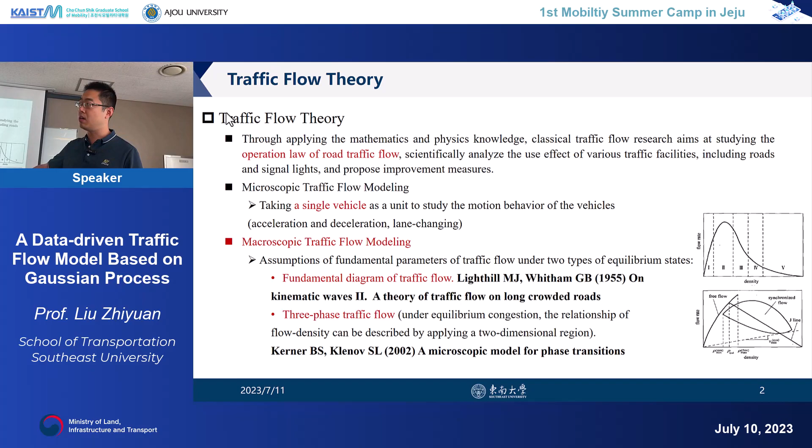like microscopic traffic flow modeling, where we use the motion behavior of the vehicles, and macroscopic traffic modeling. A very famous macroscopic traffic model is the fundamental diagram. This model was proposed about 80 years ago, in the 1930s, by the very famous professor Greenshields. I think you all know the Greenshields model for the fundamental diagram, right? In the following decades, nearly 100 years, we have different types of traffic flow models, for example the LWR model and the MFD, those new developments. But all this research dates back to the initial point proposed by Professor Greenshields.

Back in the 1930s, when the private camera was just popular, Greenshields used this camera to take pictures of the moving vehicles. So we see that he must be a very boring person. Why? Because if you buy a new camera, you take photos of your girlfriend. He takes the camera to take photos of the vehicles. But because of this behavior, he found a very interesting phenomenon.

It's this line here, okay? The x-axis is density. The y-axis is speed. He found out that there is a trend between density and speed. That means if the density is high, the speed gets much lower. So there's a negative proportion between the density and the speed. This we call the number one scientific finding of traffic engineering. We borrow different theories from mathematics and economics into the transport area, but it's a consensus that this finding is the most important research finding in the transport area. And that gives us this traffic flow theory model.

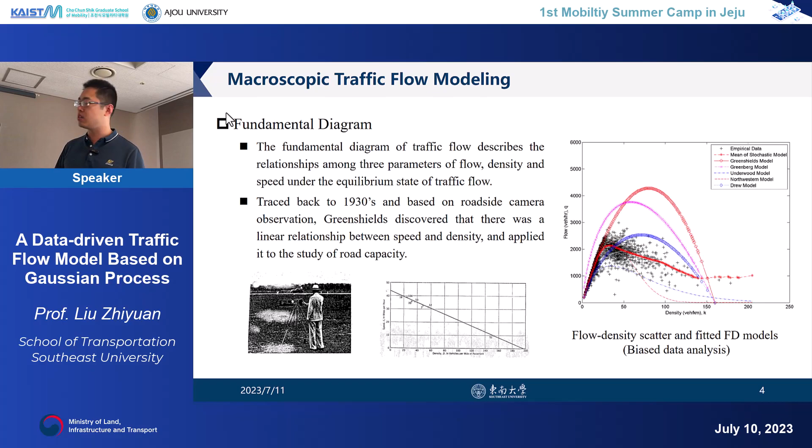So Xiaobo just considered unbiasedness, and then he developed a new model. Okay, it's the Qu model, right? Yeah. So this research is still the frontier, and it's a very hot topic until now. But today, because we are focused on the new trend, it's like a new generation of model.

So we don't talk about the good side of this fundamental diagram. We talk about the negative side. Only when you find the problem, you can make a new contribution, right? So when you find a problem, you are more than half successful because you can always find a method to solve your problem. So finding the problem is the most important for the researcher.

So we talk about this model, and we find 3 very key problems. I will deliver to you the 3 problems. So if you agree that this problem is not acceptable, then you will see the value of big data. You will see the value of data-driven model.

Okay. So number 1 problem is that if you read papers, you can see there are piles of papers on the traffic flow model. Greenshields, Underwood model, all these models in the past 80 years, they assume one thing: equilibrium state. For example, Eddy's paper. Eddy is a very famous professor on traffic flow theory. All his papers published at good journals, TR Part B, Transportation Science, have one assumption: equilibrium state. So if you just take this assumption, you will be confronted by a lot of mathematical equations.

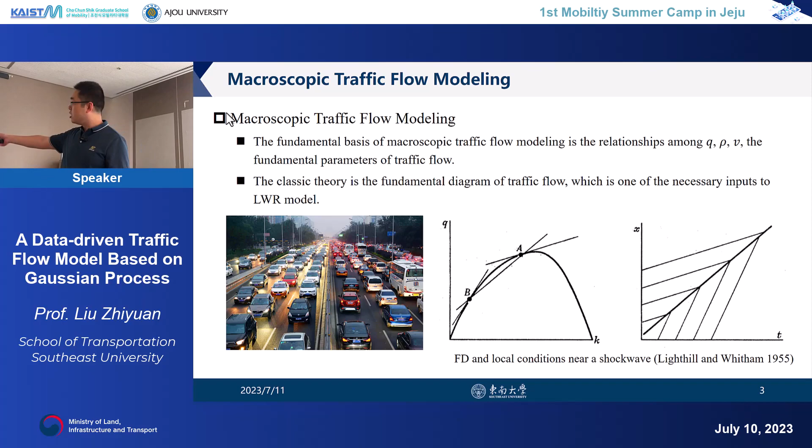But when I teach my students this, I doubt myself, why is it spatial average speed? The textbook told me so, but I don't really understand. I just memorized it, okay? So this fundamental diagram, we will doubt it. Q equals rho times V holds only if you assume the equilibrium state.

And another very important outcome is that when I read the textbook for traffic flow theory, they have this conclusion, that you can use the harmonic mean of speed at a cross-section to replace the space mean speed. Why do you need something to replace the space mean speed? Because this value is not easy to measure. It's difficult to measure, so that's why they use this.

When I read all the textbooks, just like at your age, I learned traffic flow theory at least 3 times. Undergraduate study, PhD study, and also. So I learned this traffic flow theory. I read all the textbooks. They tell me this conclusion. But how come it's true?

So after I do my own research, I do a lot of derivation. I have 2 pages of mathematical equations. I do all the derivation. I finally understand. Only if you assume equilibrium state, then this conclusion is true. So that means a lot of existing conclusions in traffic flow theory are problematic, because in urban areas and in a very chaotic system, the equilibrium state doesn't make sense. You understand me? Okay, that's the first problem.

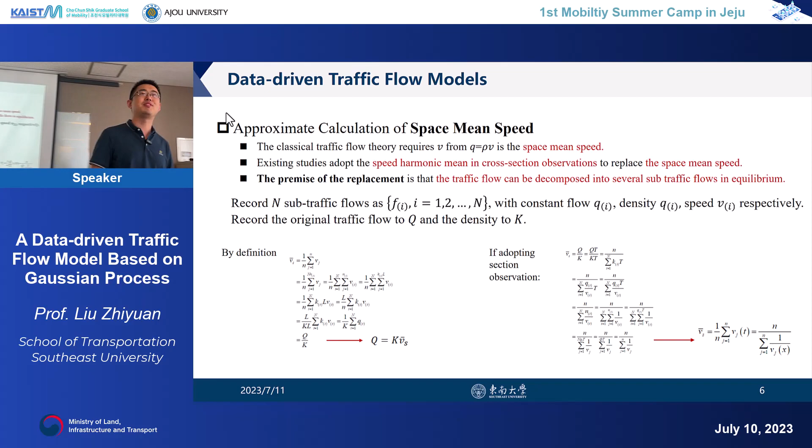Albert Einstein is great because he found the problems and then he could find a good solution. He was poor in mathematics, but he could get helpers. So the most important capability of Albert Einstein is he can find problems. So now we've just delivered the first problem to you, and let's see the second problem.

Okay, the second problem is that in traffic engineering studies, we have 2 different standpoints, 2 different patterns for data collection. One pattern is cross-section observation, okay? Dr. Kim will give you a lot of data by cross-section observation. So this is a very theoretical term. So what does that mean? That means you use sensors to get data, okay? Imagine there's a detection loop or some kind of gantry for traffic flow observation. So you have sensors at one point to collect data, okay?

So for this cross-section, basically it means you focus on one location. So you compromise the spatial value. You only focus on one spatial point, one location, okay? And you collect data for a certain time interval. You understand me? Yeah, so the space is compromised, only one point. But you collect data for 1 minute or 1 hour, and then you get all the data you need. You can measure the density and the speed, right? Yeah, so this is a cross-section.

And another is instantaneous observation. So instantaneous is on the other side, okay? So you just focus on one time spot. So it's instantaneous. And for the spatial interval, you have a certain spatial interval. You get me? So for instantaneous observation, at this particular time spot, you can measure the speed of all the moving vehicles and also the density of this traffic flow.

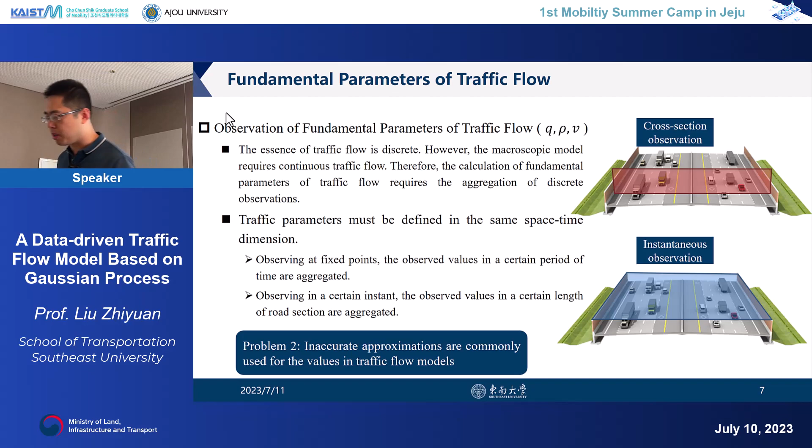The answer is no. Still, if it's an equilibrium state, they are the same thing. But in urban areas, the vehicles are changing their speed all the time. So statistically speaking, they are not the same term at all. So if you use this replacement, later I will show you, the error could be 50%. That means it's a very, very big mistake you are making here. Okay, that's problem 2. So you should not use any inaccurate approximation. And that's a problem of traditional models. Okay, so let's come to the third problem.

The third problem is very easy to understand because I'm working on the big data side. And these days in the urban area, the local Land Transport Authority provides us with different kinds of big data. We have more than 30 types of big data. But for your traffic flow theory model, how many types of data can you use? They can only make use of at most 3 types of data, because there are 3 terms, right?

Q, rho, V. Q, rho, V, and you even have mathematical functions to build a connection between them. So actually there's only one decision variable, which is speed. Okay, so when you get the speed, you can just calculate the density and you can just calculate the flow. So there's only one variable.

So we have 30 plus different types of data, but your model can only take 3 variables. That means you are wasting at least 27 types of data. You get my point? So our previous modeling framework is not powerful enough to handle the data. The whole framework is just not able to accommodate other different types of data.

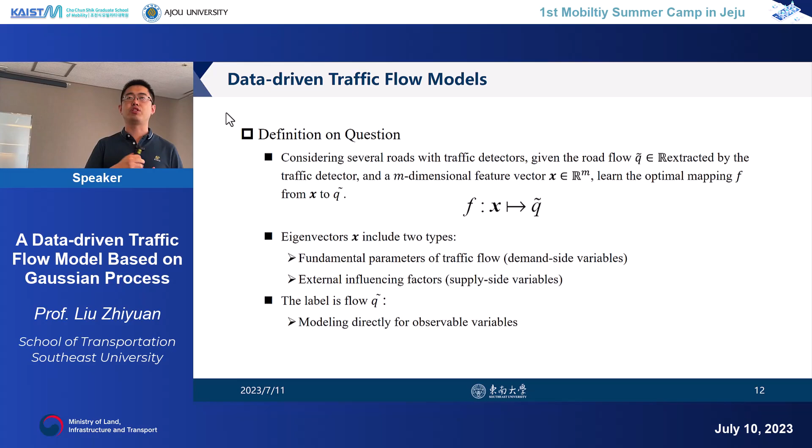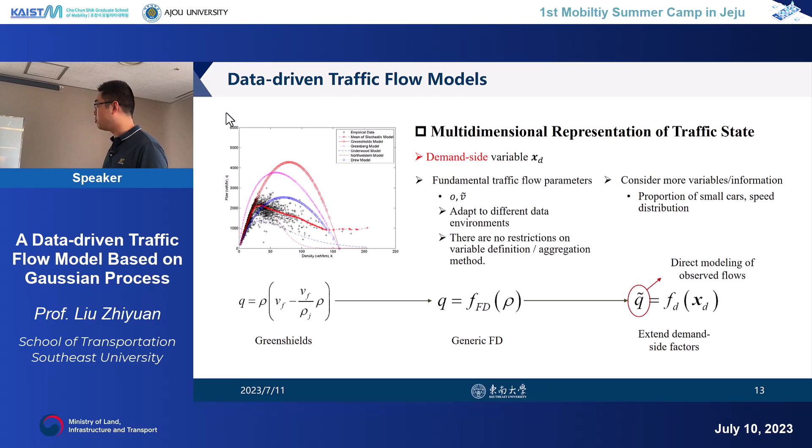So here for our theory, we first focus on demand side variables. So we find all these variables related to traffic flow itself. For example, the speed, the density, and all other features of the traffic flows. So we focus on the demand side variables, which is very straightforward, not a surprise. But we just ask ourselves, for traffic flow, have you ever thought about the supply side variables? Do the supply side variables affect traffic flow movement?

The answer is yes. So your traffic flow, especially in the chaotic urban area, is largely affected by the traffic signal, by the weather, by the road geometric design, whether there's a bus, whether there's a median. It's a big factor to influence the traffic flow. So why not consider all these supply side variables as decision variables in traffic flow theory? That's a breakthrough we have made there.

Okay, so for our traffic flow model, we just develop a model like this. So there's demand side variables and there's supply side variables, and there's Q. So what does that mean? That means previously, Dr. Yin He was working on traffic signal analysis. So you optimize your signal. You use Vissim. Dr. Yin He also worked in PTV, the best simulation software in our area. So you use Vissim, you use software to analyze different signal plans.

You have 10 potential patterns, and you use Vissim to analyze, to measure each of them. You find the best one. But there are maybe 1,000 other potential plans. You just don't have enough time to measure them. So what we do is that we take the signal plan as a decision variable in our traffic flow theory. In that case, we don't need simulation to measure a given plan. We can just use the traffic flow model to output the best signal plan. Okay, you get me? So that's actually a very initial trend of large models.

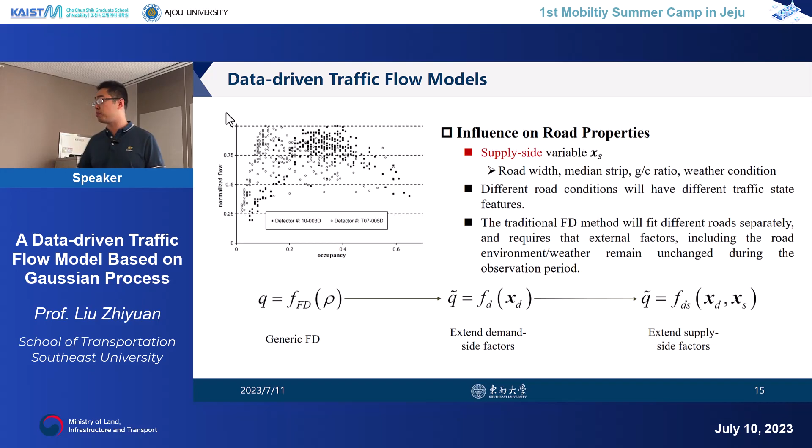We can take the traffic signal, the weather, all those things. As long as it has impact on traffic flow, we take everything as our decision variables, as our parameters. So that's the idea behind large model. Okay. So it comes to this part.

I take myself as a modeler. So I spend most of my time on the mathematical equations, on the algorithm. So actually, most of my time I focus on this part, from this slide onwards. But here, what I want to deliver to you is that even though you can build a very complex mathematical model, the model itself is nothing. The model is just some already mature tools that you borrow from the mathematical disciplines.

So what is the most important is your idea, is your critical thinking, is the problem you find in existing study. So as long as we find the problem, we have our idea, which is our modeling framework, then this part becomes very easy. This part you can definitely find someone good at mathematics to help you, just like Albert Einstein.

Okay, so here, what kind of model can we use for a data-driven problem like this? We have supply side, we have demand side decision variables, and we use the flow as our output, as our label. So what kind of model do we use? If you read a machine learning textbook, or a survey, you learn about machine learning models, like SVM, deep learning, right? TensorFlow. Or you only learn about ChatGPT, right? Because it helps you on the homework. Yeah. So all different types of model, yes, you can use them.

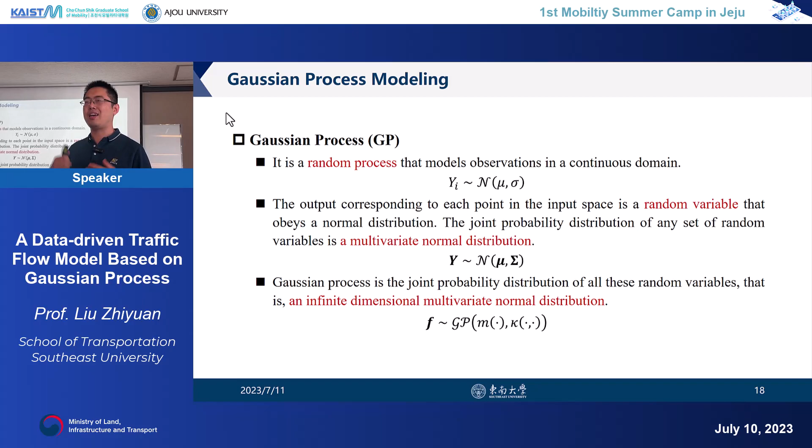Okay, so here we come to our Gaussian process. The idea behind it is very, very easy. But if you check a paper, you check a textbook, it will be a real torture to you. You will find it's a headache to read those papers because of a lot of mathematical equations. So same story to me. Back 5 years ago, the first time I studied the Gaussian process, at least 2 months of my time was wasted. Why? Because I checked everything from the internet. And on the internet, a lot of study materials for Gaussian process are wrong. A lot of errors. People do not really understand the Gaussian process, but they write those blogs, those online papers.

So the idea behind the Gaussian process, I can use 3 minutes to tell you the real idea behind it, and you will understand the most powerful and the most frontier machine learning tool we use nowadays. Okay, if you go to MIT, you go to Berkeley, those top universities, the OR professors, the computer science professors, many of them work on the Gaussian process. It's very frontier. So the idea behind it is like this. Okay, let's start our tour.

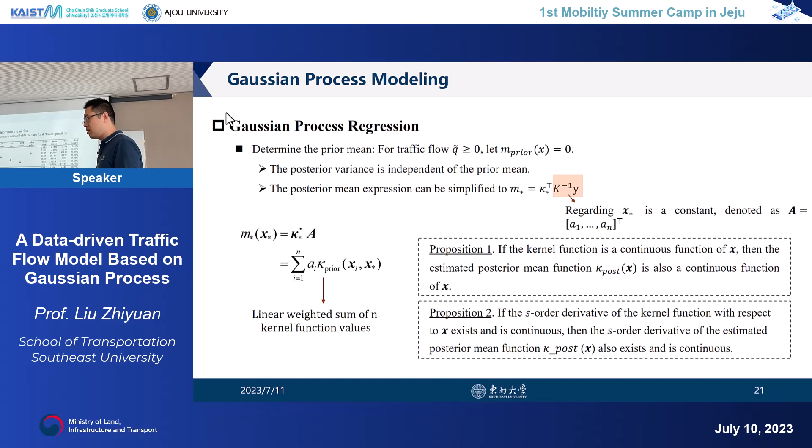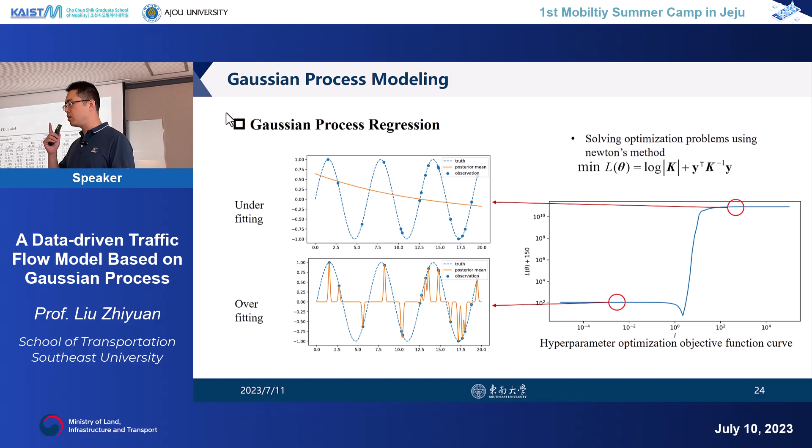If you are working on big data, you want to find a job in future as an AI-related, AI-aided engineer, so you should give a very straightforward answer to this question. What is the value of machine learning? The key value, the most important value, is accuracy.

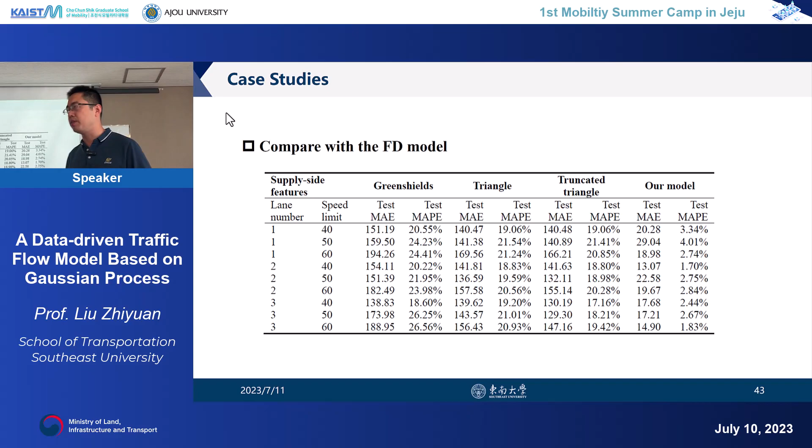Okay, so we did a test, which is falsifiable. Falsifiability is very, very important for transport studies because some of our previous theory, four-step model, the user equilibrium, although the theory itself is very complicated, it's not falsifiable. It cannot be tested in practice. That means it's not science. It's not real science. Okay, so it must be falsifiable. It must be okay to test. So how to test our model?

We use fitness as a very, very simple test. Okay, the fitness itself is objective, is reliable, is falsifiable. So if you collect real data and your data is reliable, you find that the Greenshields model, the fundamental diagram model, the fitness error, we're not talking about some other complicated task like prediction, like planning, we're talking about the fitness itself, the fitness error is higher than 20%, which is definitely not acceptable. So 50% means purely random.

20%: you spend so much energy, you spend 80 years on a theory to kind of refine the model, but the fitness error itself is higher than 20%, which means the model itself just lose 80% of useful information. Okay, so fitness error, if we check the Gaussian process, our model, we haven't really fine-tuned the parameter. So just the initial model itself, the fitness error is lower than 3%. It's 10 times better. So you get the point behind?

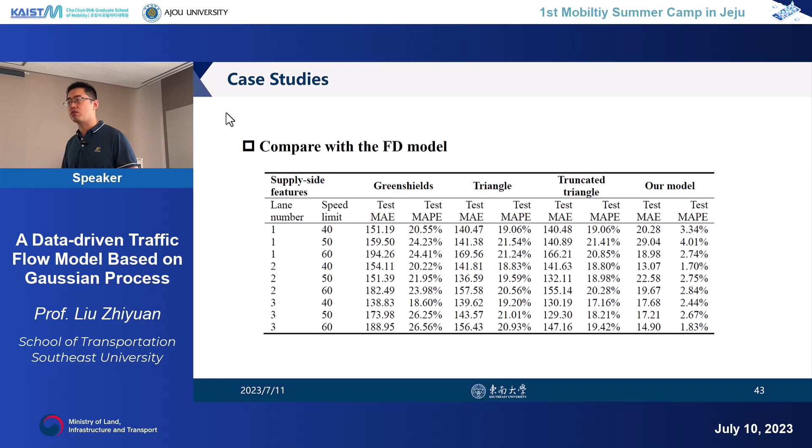Yeah. So if you have a powerful tool, then this tool can underpin your even more complicated task. So once you want to handle a very complicated task, for example, in urban area, transport planning and the area-based traffic signal control or area-based traffic safety evaluation is a very, very challenging task. So for a complicated task like this, you need to use a powerful tool. Otherwise, the model itself will just lose more than 20% of your useful information.

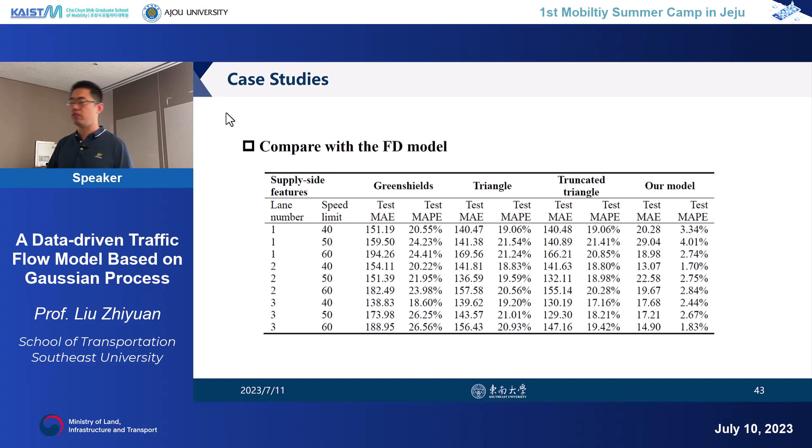Okay, with that, I finish my presentation. Actually, we come a long tour to talk about the Gaussian process. We found the problems behind traffic flow theory. Usually, I don't spend much time on the mathematical part. And today, what I want to deliver to you is critical thinking and the idea behind.

So even though you have different backgrounds, I hope that the idea can help you to better deal with your own problem. For example, if you are working on network planning, congestion pricing or taxi sourcing, those very frontier topics, or shared mobility, or of course autonomous driving. If you are working on those problems, as long as you find your problem is not linear, is not convex, it's very, very complex, then you should realize that I can use a surrogate model. I can use a machine learning related model to help me better solve my problem.

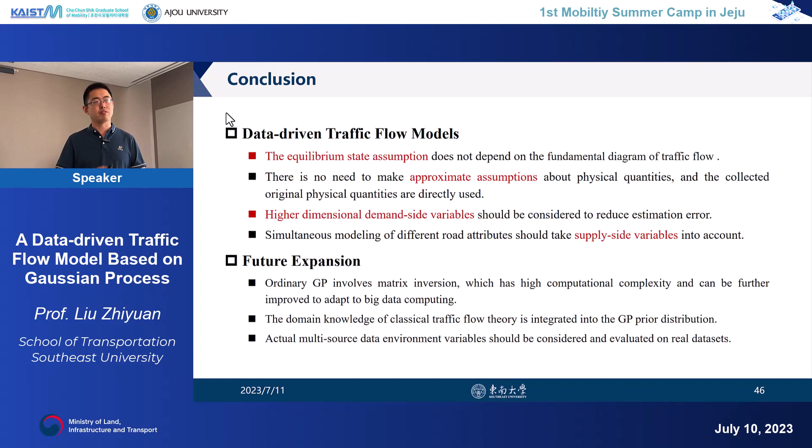How come it can better solve your problem? Because it has higher accuracy. Okay? So this is the idea behind it. Hope that this idea can help you with your future research and future job. Okay, thank you.

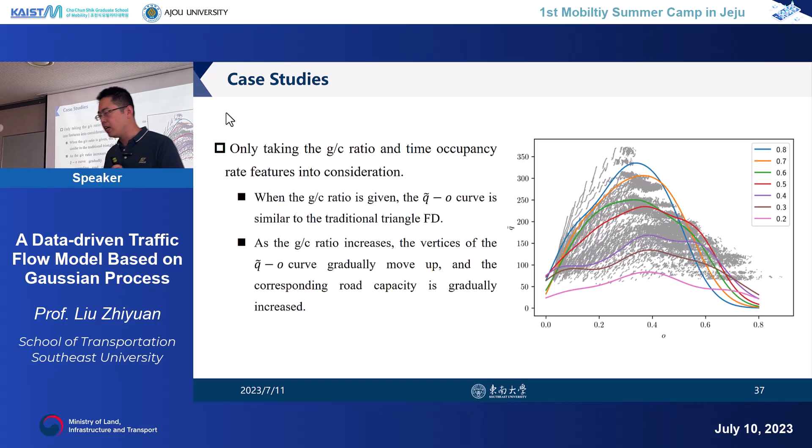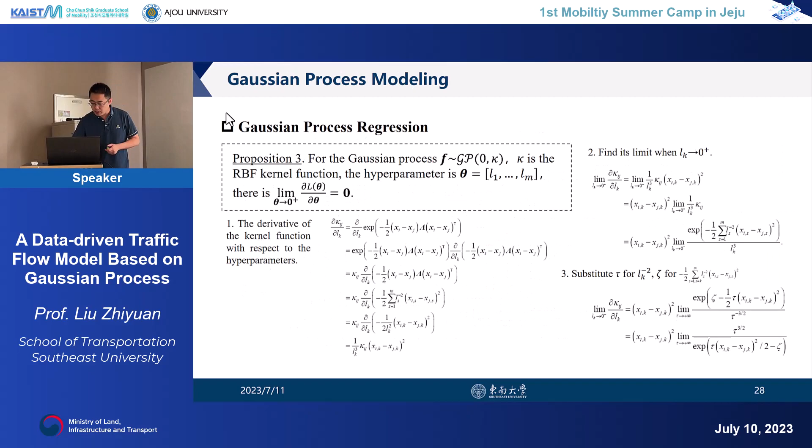This is a very good question from a real expert. So we encountered all the problems Dr. Chen has mentioned. Today, because I'm on stage with these young folks, the young generation, I focus on a very easy to understand problem, which is fitness. But actually, I can send you our recently published paper in TTD. So we encountered all these different problems. Let me go back to my visual aids. Okay. So we encountered several types of problems.

Another problem besides the fitness is that if 2 points get quite close, that's your question, then the whole method is undermined. Why? Because for this problem, you use all types of matrices to help you with the calculation. And for Gaussian process, if you're familiar with the calculation, more than 90% of the calculation power is spent on matrix multiplication and matrix inverse. For the matrix inverse, each row and each column is actually one data point. If 2 data points get closer, this matrix will be singular, because 2 different rows are linearly too related to each other. So in this case, the problem cannot be solved.

I haven't prepared my slides, but I'll just describe it, okay? If 2 points can be very close, then the surrogate model will oscillate, and it's impossible to use. So how to solve that problem? We use some mathematical tool to replace the previous matrix inverse calculation. How to do that? I'll try to describe this in a short time. If you have 2 points, they are actually 2 vectors.

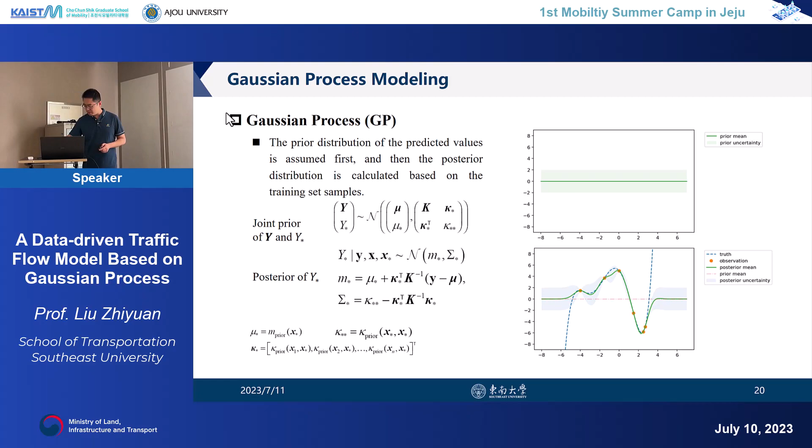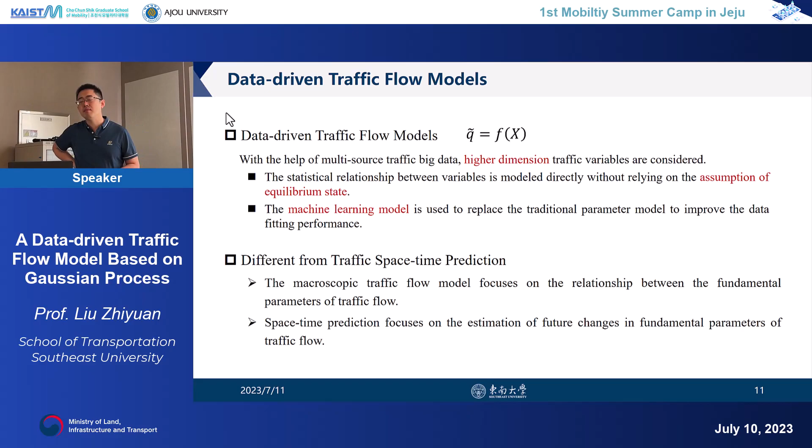I think there'll be a wide range of questions in today's lecture, but my question is derived from the previous point mentioned in the PPT. It is difficult to maintain an equilibrium state of traffic flows in reality. So if you want to construct an environment in microscopic simulations that is identical to reality, we often model driving behavior, implement flow for a group of vehicles, estimate queue lengths and add other index variables and parameters among various factors.

What do you consider to be the most critical traffic condition factor in implementing traffic flow to be close to reality? Okay. Good question. I don't know whether I fully captured your question, but let me answer first, and if not, we can further communicate.

So for your traffic flow model, you use it for what kind of objective? For autonomous driving or for mixed traffic flow? Mixed traffic flow, right? You have buses, you have large vehicles, you have small vehicles, right? Yes. For those kinds of models, initially, because today our topic is actually macroscopic, we didn't focus on microscopic.

So for microscopic, we find a very similar problem: you use some simple rules to describe the vehicle motion itself. Basically, two most important ingredients. One is the following behavior, one is the lane changing behavior, right? For these two behaviors, you use Newton's theory to understand and also control the vehicle motion. Then you apply this outcome to all the different cases. That gives you a problem.

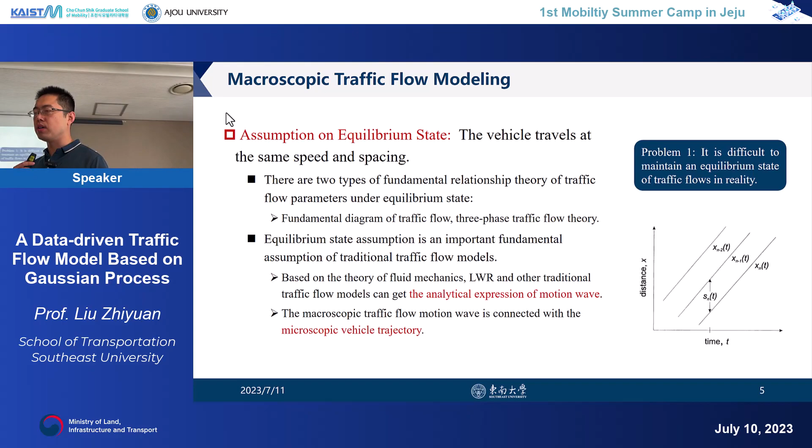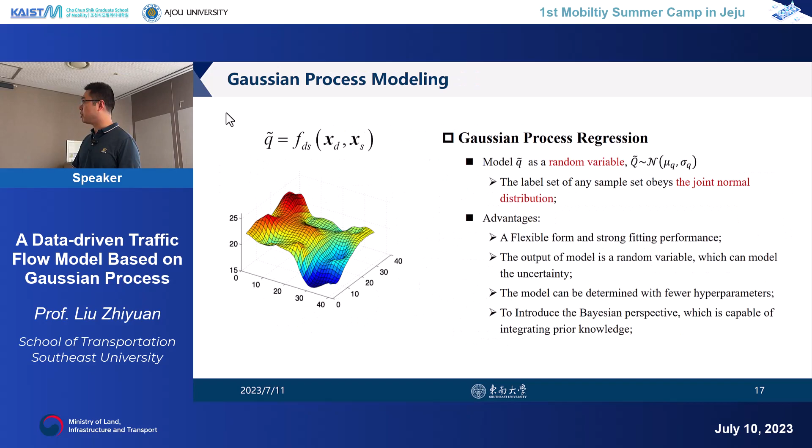It's very frontier and it's definitely very, very powerful and important. So go back and Google this term, simulation-based optimization. You will find that for SBO, do you know which is the most modern method? It's Gaussian process. So Gaussian process actually helps you to better set your problem. Because for traffic simulation, your parameter is basically a black box problem. The black box problem is this green color function. So you want to find the best one. If it's autonomous driving, you want to know which is the most risky road environment. Only that case gives you a more valuable research outcome.

But I don't know which is the most risky one. Although I have my evaluation index, I don't know what are the best parameters that give me the optimal index value. So how to do that? You need Gaussian process. You need to do simulation-based optimization. If you do that, you enhance your work to another theoretical level. What people did previously, for example, 10 years ago, Ian and myself, at a very young stage, doing our evaluation problems, we just used VISSIM with 10 different parameters. And for each pattern of parameters, we needed to run the simulation maybe 10 times or even 100 times because it's stochastic. So in that case, your problem is experimental.

It's not theoretical. So if you use a tool like this, you are very confident that my output setting is optimal. It's not something that is just the best among my current experiments. It's theoretically so. Thank you very much. Yeah, I agree with that. I think the Gaussian process is a very good tool to calibrate all the parameters. Yes. And remember, I told you, every young generation, you have superpower, right? Techie man. So for your problem, if you learn all this TensorFlow, you learn from Dr. Kim, you can just write maybe 20 lines of code to solve a problem. It becomes a very straightforward task.